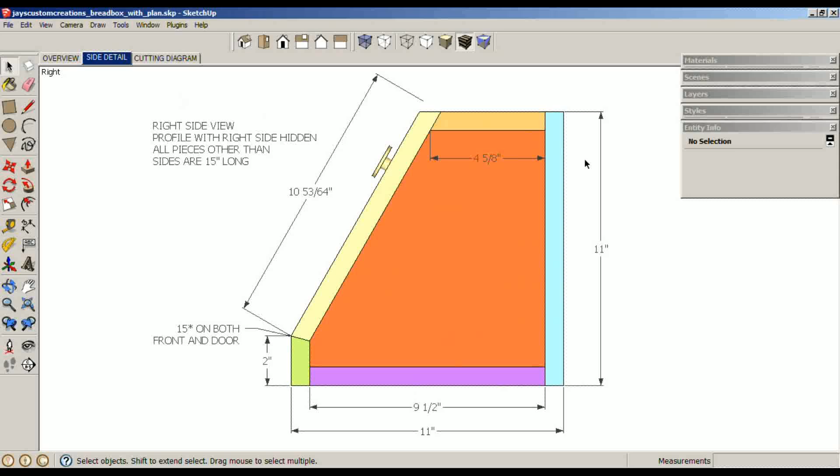Alright folks, this week's project is a pair of bread boxes, and I'm going to show you how to make the plan as well as the bread box itself. The bread box is very easy, you can whip right through making it, nothing special. But I want to show you how you can set up a little plan. I've got the overview, which is like a trimetric image of the box, a side detail which shows all the dimensions, and a cutting diagram to show your layout. Very easy to do, and I'll show you how you can make all these different scenes with different layers. Stick around and I'll get right to it.

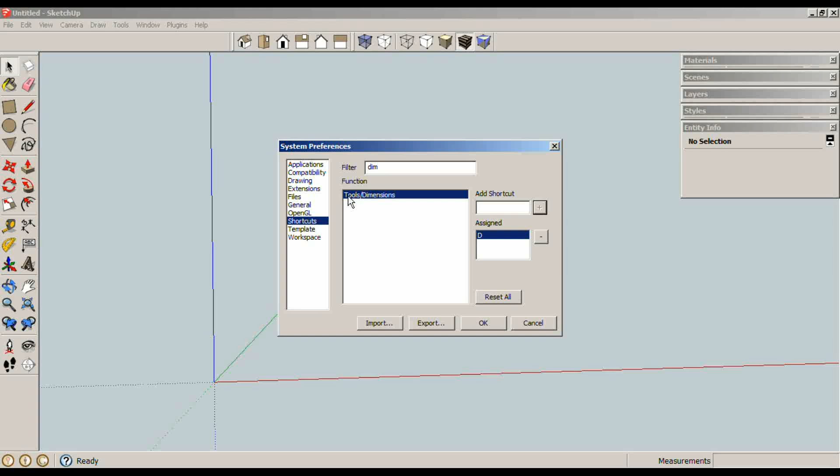Alright, so the first thing I need to do is set up a keyboard shortcut. I'm going to use the dimension command a lot, and I like to have keyboard shortcuts, it saves a lot of time. So Window, Preferences, this is how you can set one up. Shortcuts, find whatever tool you use a lot. I'm going to use the dimensions tool a lot, so D for dimension, press the plus sign to add it. Now every time I press D, it'll give me my dimensions tool. Test it out, D, and there's my dimensions.

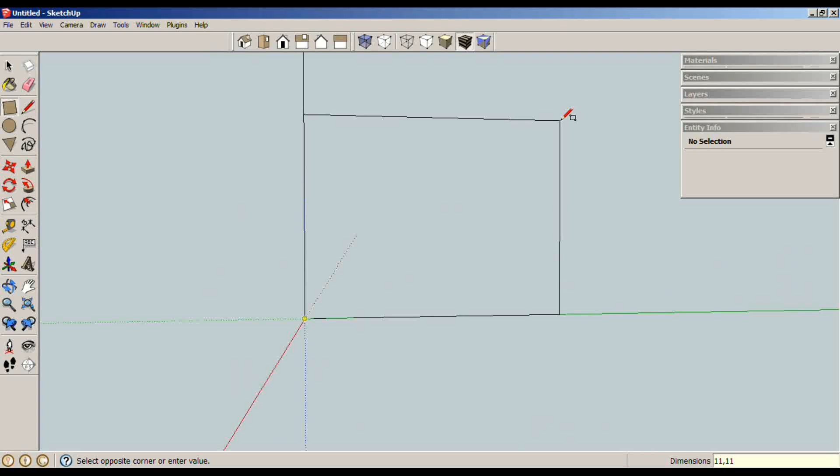Alright, so now let's start building the box, and I want to draw it on the blue-green plane, which is the side, and right now I'm on the blue-red, so let's rotate around. R for rectangle along the blue-green plane, 11, 11, and the only cut I have, T for tape measure, is 2 inches off the bottom, a 30-degree line off a vertical, and L for line to connect the dots here. Use a crossing to delete this, delete that. P for push-pull this direction, 0.75 inches for the thickness of 1x material.

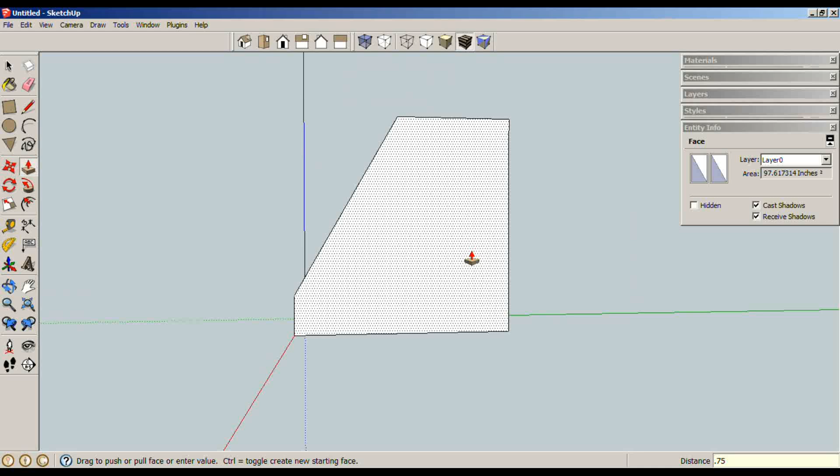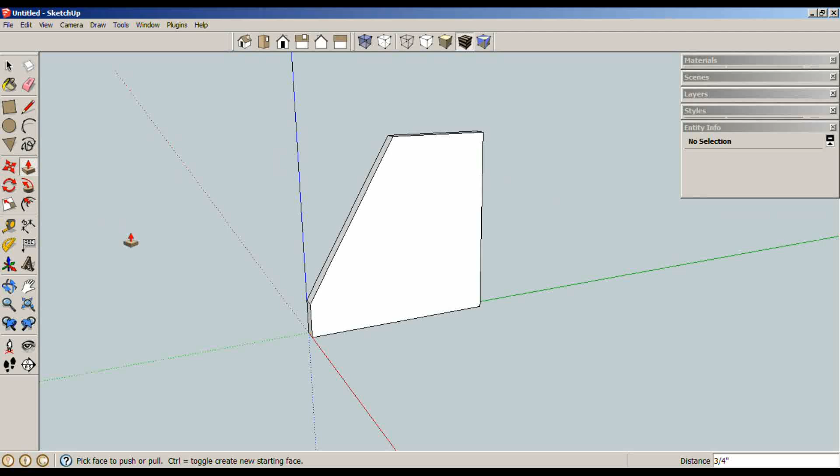Now, this is going to be built with rabbet joinery. One of them is going to be rabbeted construction, and the other one is going to be pocket hole construction. That doesn't matter as far as this drawing goes, because the only difference is there's going to be a rabbet here, and one on this one, and one that's not going to have the rabbet. So, no big deal. Let's use our offset command on this plane, and go in 0.75 inches for the thickness of our new material. P for push-pull, let's push the rabbet in 0.375, half the thickness of a 3/4 inch board. Spacebar, triple-click, G for component, enter.

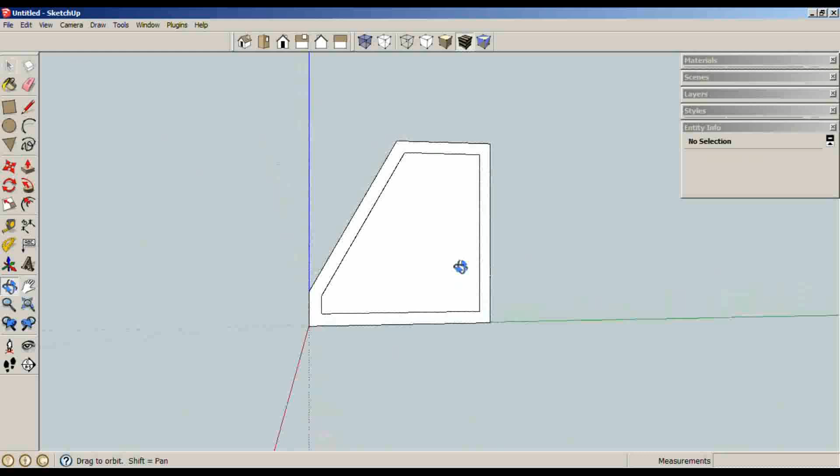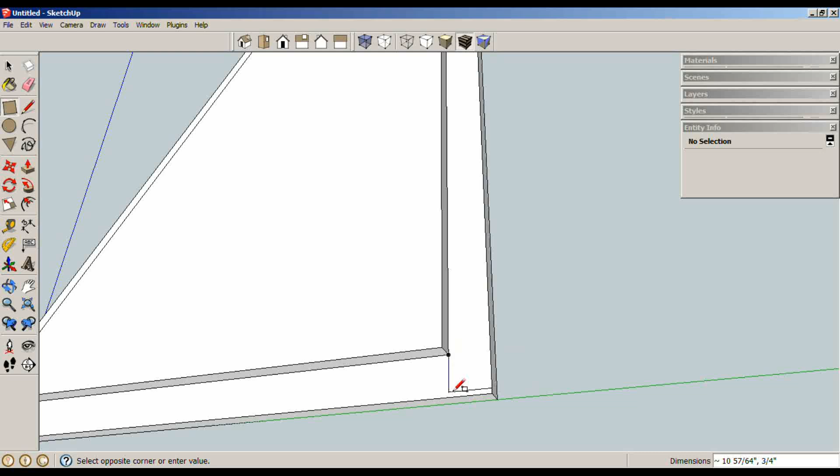Now we can start drawing our different sides here. The back is going to be the full length, so R for rectangle from this top corner all the way down to the bottom. To get this exactly where I want it, I can put my mouse over this, and once it says endpoint in component, it snaps to that endpoint, giving me a perfect vertical, and the little black dot's still highlighted. That's perfect right there. P for push-pull this direction, 15 inches, enter, spacebar, triple-click, G for component, enter.

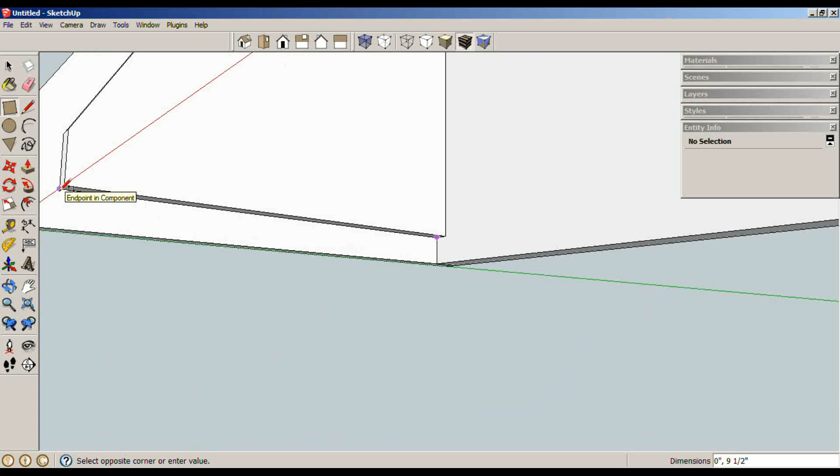All my pieces, other than the sides, are going to be 15 inches long. Alright, so let's draw the bottom. R for rectangle from here over to this point, endpoint in component, and it's snapping to that point down here. P for push-pull this direction, 15, enter, spacebar, triple-click, G for component, enter.

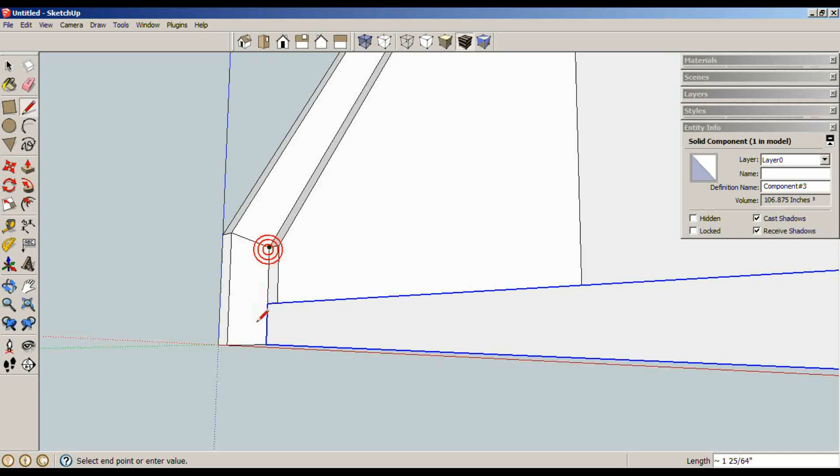The front face, this is a 30-degree angle, and I want the front and the door itself to split that 30 degrees. So we can just connect the dots here. This is 15 degrees. All my measurements are already here, no drawing needed. P for push-pull this direction, 15, enter, spacebar, triple-click, G for component, enter. So that's what the front face is going to look like.

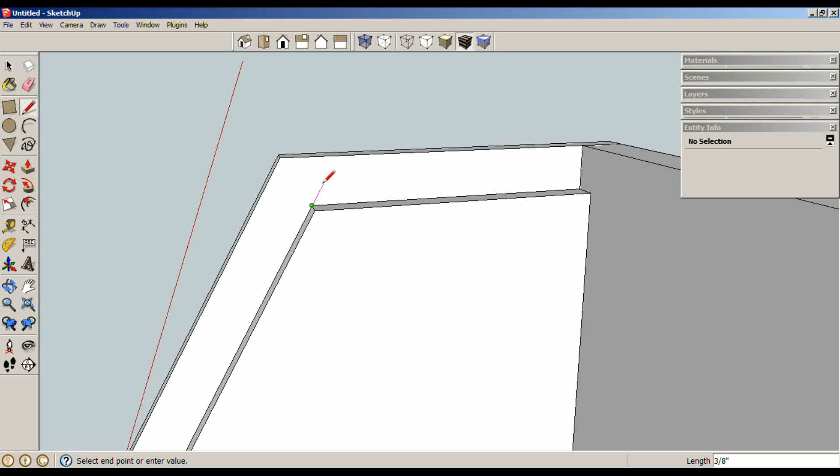And instead of splitting the difference here, I actually want the door to go all the way to the top. So let's draw the top piece. L for line over here, and I want this angle right here to be exactly lined up with this. If I hold my mouse over here, it says edge in component, and it'll snap to that edge, parallel to edge, so it gives me an extension. Whoops, I messed that up, let's do it again. Edge in component, now parallel to edge from the point up to there. P for push-pull this direction, 15, enter, spacebar, triple-click, G for component, enter.

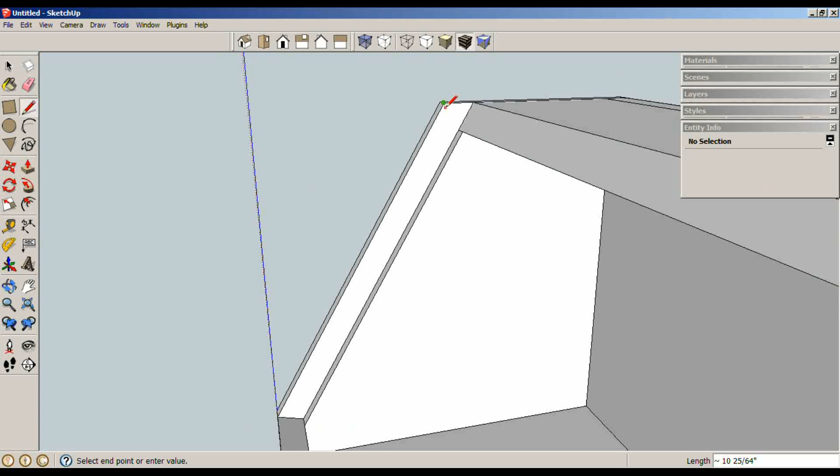Now the door itself, everything's already here, so I just connect the dots. That's the beauty of this project as far as SketchUp goes, very easy to do. P for push-pull this direction, 15, enter, spacebar, triple-click, G for component, enter.

Now I need to add my second side, so I've already drawn it over here. M for move, control brings up the plus sign, moving it from one side to the next, right click, flip it along the red axis because that's the direction I pulled it.

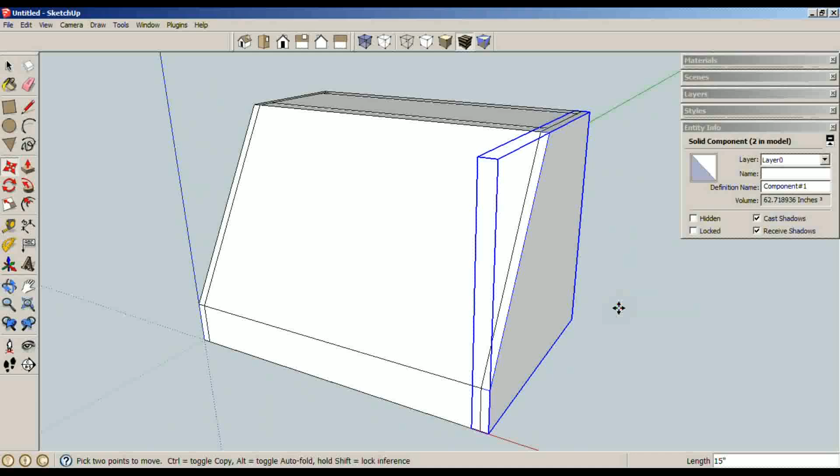So there it is, that is the bread box. That was super easy. Now I want to add a little pull here, so let's go T for tape measure.

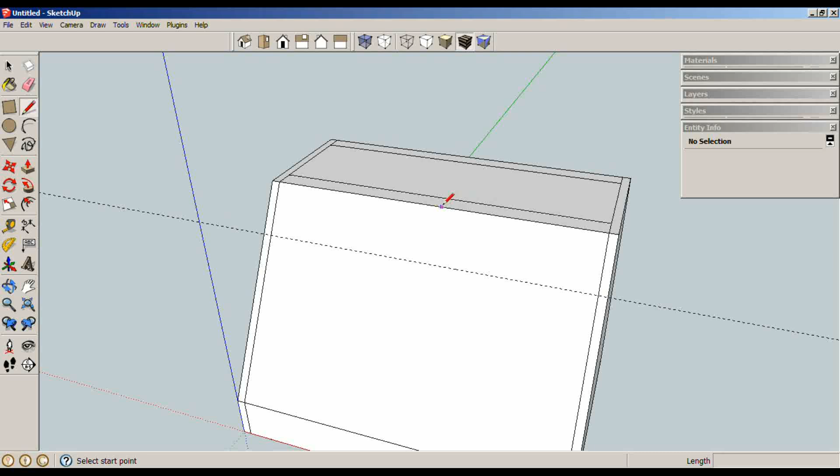I want to go down this face 2.5 inches, that sounds good. I'll draw a line right off of this midpoint. I'm using a line here because you can snap right to the midpoint of this project, and I'll connect the dots here. This gives me a reference point where I want my pull to be.

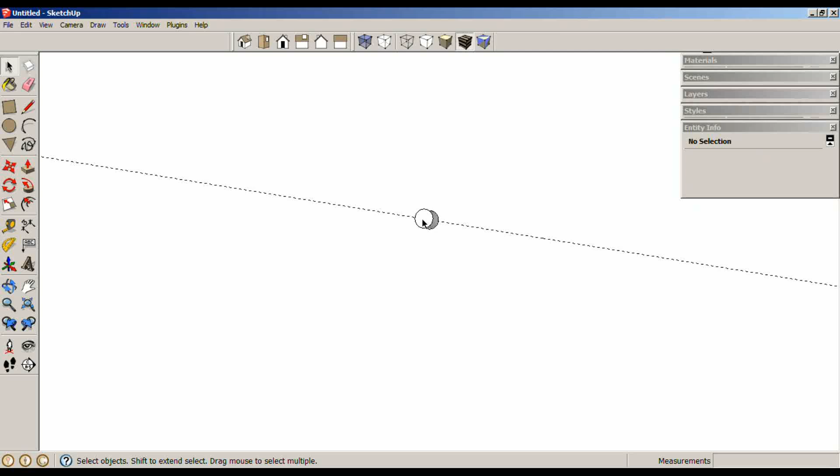C for circle, let's go 0.125, enter, something like that, and delete this line because we no longer need it. P for push pull, this direction, 0.25 inches, and we'll make that a component, I guess. Why not? C for circle, and just like our lines and edges, you can snap to them.

If you put your mouse on a circle on the outside of the circle, you can snap to the center of a circle. So 0.75 inches, that sounds good.

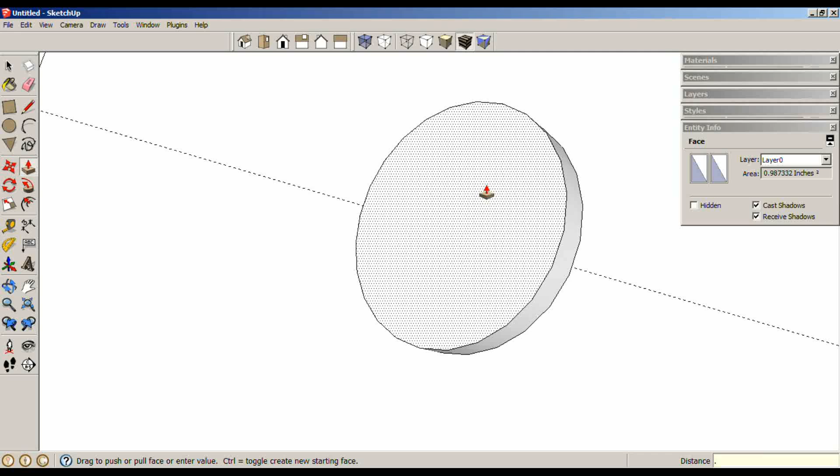P for push pull, this direction, 0.125, space, enter, space bar, triple click, G for component, enter. Alright, now I have a little fancy pull, yay.

But what if I just rotate this? So Q for rotate, and if I just rotate the door, the pull stays where it was. So let's not do that.

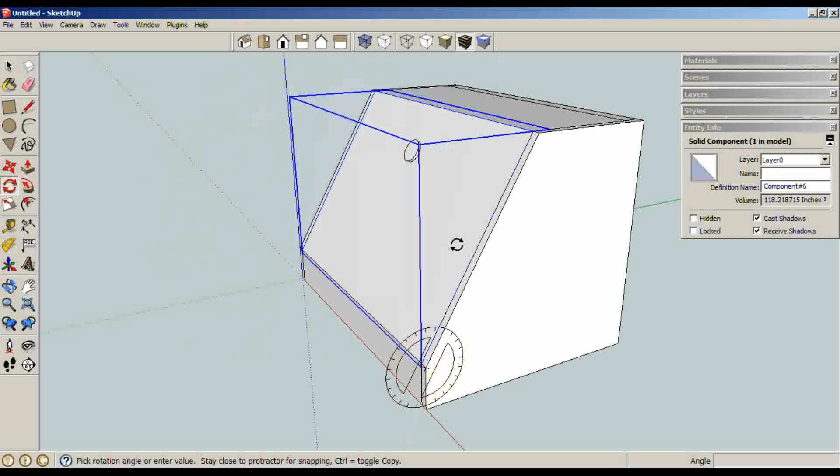Let's actually select all of this, select the door and the pull, right click and say you are a group. So now if I select a group and Q for rotate, I can rotate the entire door and the pull together. So yay for that.

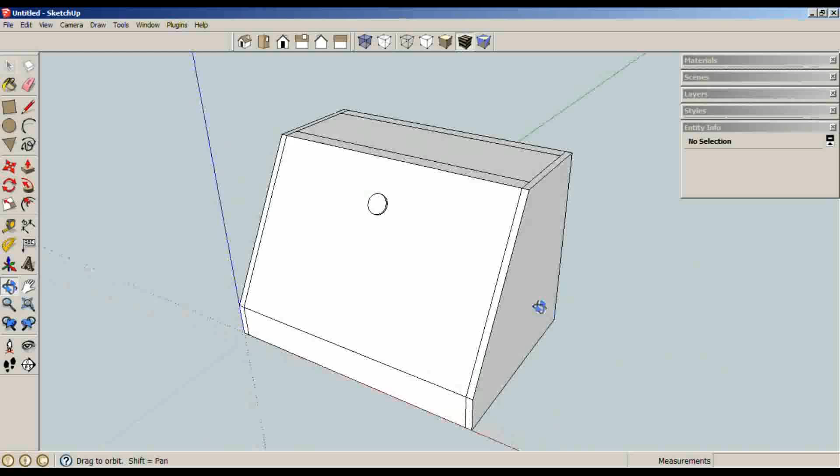So this is the actual bread box. That was extremely simple, extremely easy to make here in SketchUp. So I'm going to take a quick break real quick, and then we can start making the actual plan.

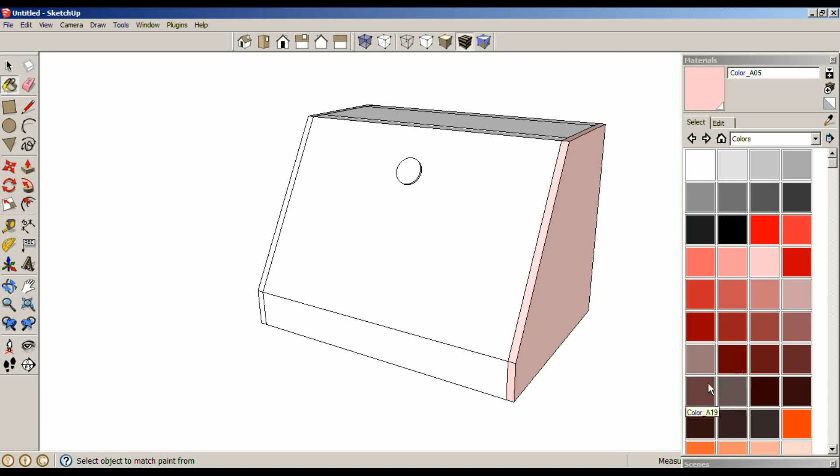Alright, with the physical box done, we can start working on the plan. The first thing I want to do is start distinguishing all these different parts. I like to just start assigning various different colors to all the pieces, so that way we have some type of distinction between them. I'm going to pick a color randomly for each piece.

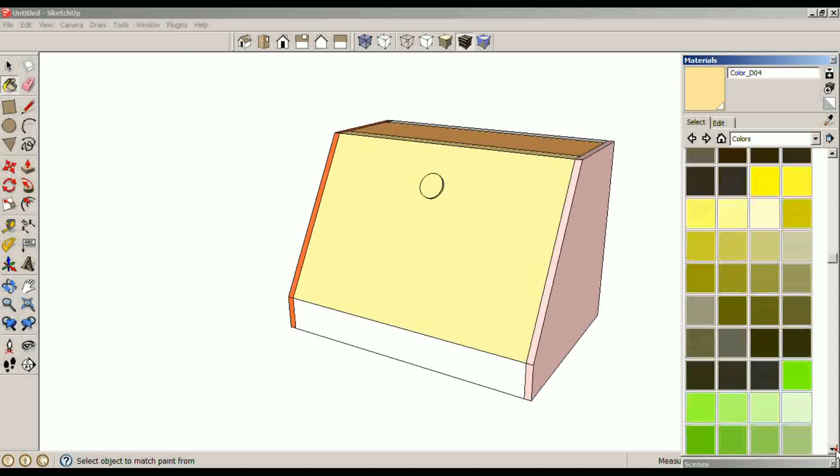I really don't care what each piece is, I just want each piece to be different. That way I can show you in the cutting diagram each individual piece. And just to be honest with you, these are some horrible colors here, but they are all different.

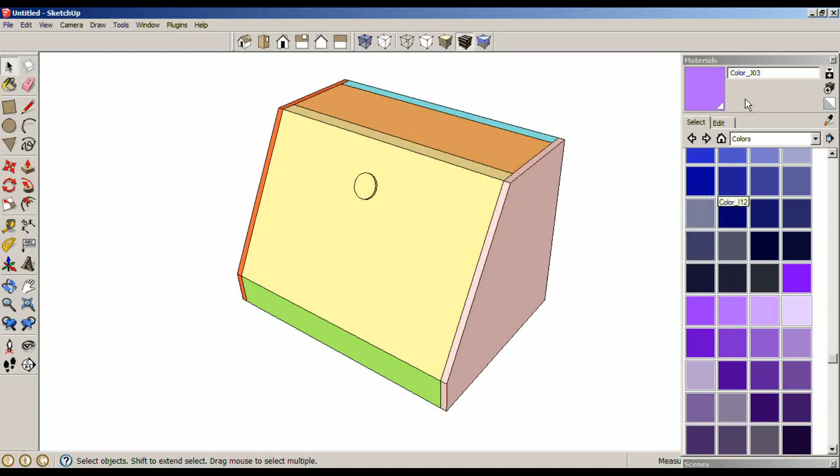Okay, now we need to set up some scenes and layers. First scene is, let's call this overview. Second one, let's call this—the only detail we need to show is basically the side, you can get everything in that one, so side detail. Third one is going to be my cutting diagram.

Let's go to overview, I just hit right click and update for whatever reason, I don't know. Alright, all of this I want to be on one layer, and I want the cutting diagram to be on another. So let's first add a layer, overview, and I can use the overview layer in both overview and side detail. Second layer is cutting diagram. So I want to put all of this—right click, entity info—on the overview layer.

Okay, now that I'm on the overview scene, I want to only have the overview layer visible. So let's uncheck these, right click, and update. Same with side detail. I'm on side detail and I only want overview to be visible, so uncheck these, right click, update.

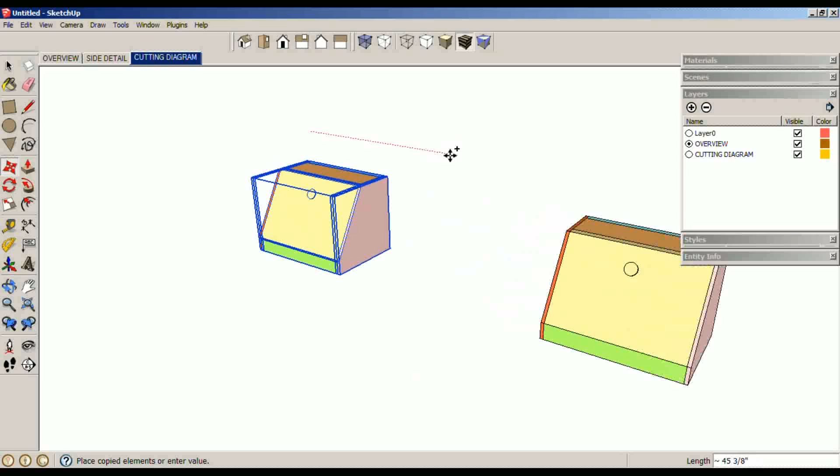Cutting diagram—on this one, I want to copy all of this to another location, and this right here—right click, entity info—it is still on overview and I'm about to hide it. But first I want to take the new one and say the new one is on cutting diagram. So now if I hide overview, you'll see this one disappear. Let me go onto this layer first, hide it, and it disappears.

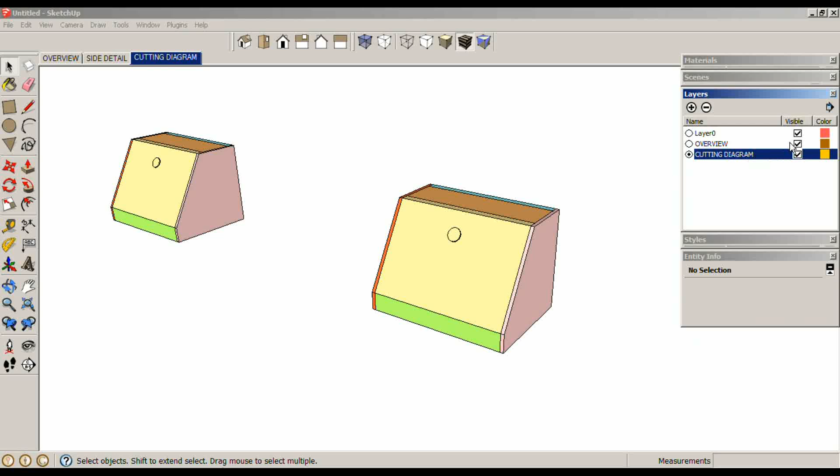Alright, update here. The overview is basically the bread box, and this is just going to be like a cover image, so nothing special. Side detail, I want to be looking perpendicular to this side face, but I want to see all of the detail right here. Easiest way to do that, and this helps because it's all color coded so you know which pieces go where.

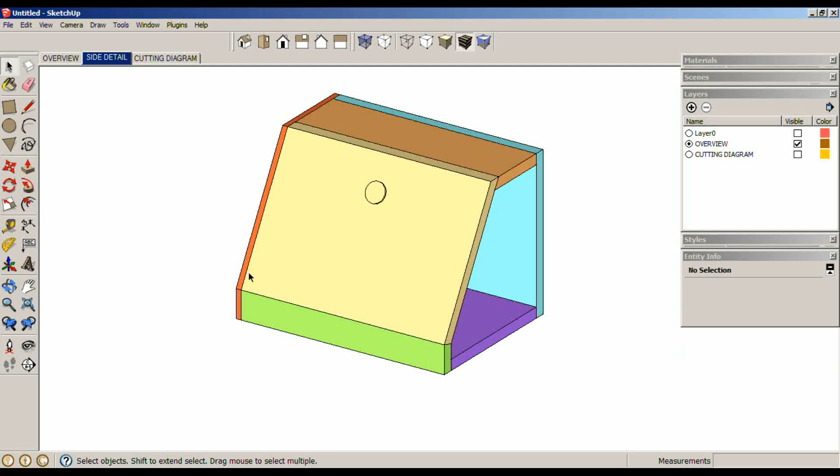Right click and hide this side. Let's take our camera and say parallel projection, that way all of my angles are no longer distorted, they are all the way they should be, and let's look at this from the right side. There you go, all of your pieces in the exact size and location.

So D for dimension, and this front face is 2 inches, and we will add a notation saying that this angle right here is 15 degrees on both the front and door.

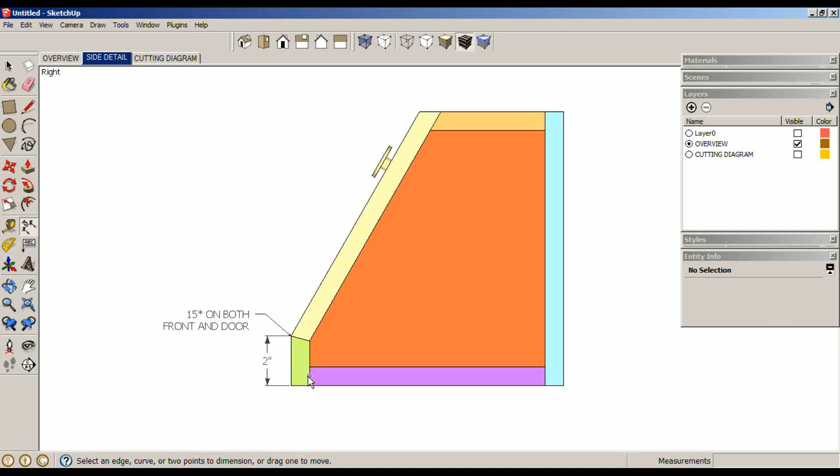M for move, let's just tighten this up a little bit. D for dimension, and this is the bottom. And because it's color coded, I don't even have to have a label saying this is the bottom, because according to the overview, you know what this piece is. D for dimension.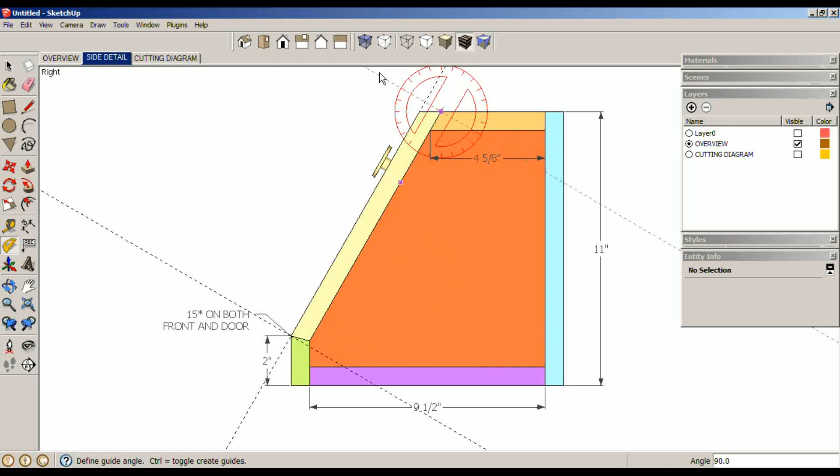D for dimension, the inside of the lid. This is going to be a little bit tricky because they're all angles and nothing is exactly perpendicular to the front piece. I'm going to add a couple guides first. I'll add one across the front and use my protractor to go 90 degrees off of this, and 90 degrees off of this. So now my leftmost part before I cut the angle, and my rightmost part before the angle, I can snap to those.

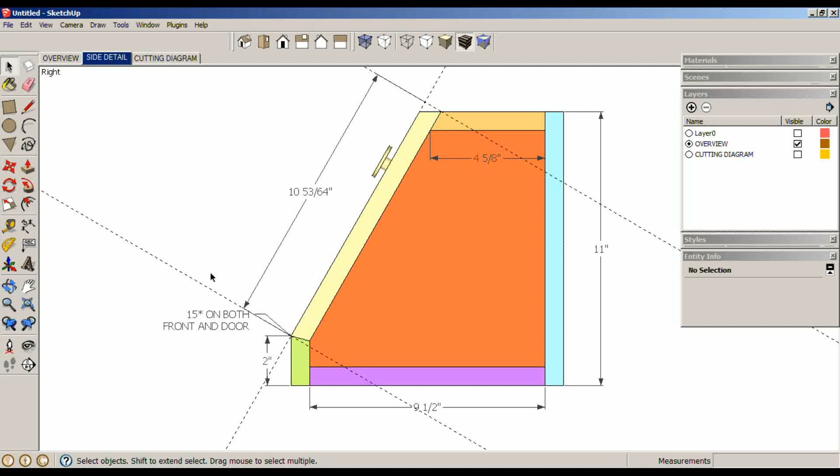So D for dimension from here to here. This gives you the length of the front door. Let's delete my little guides here. They've served me well, but I no longer need them. Let's M for move.

And it's trying to snap to something. Yeah, that's alright. So with all of these dimensions right here, you know everything about all of the pieces.

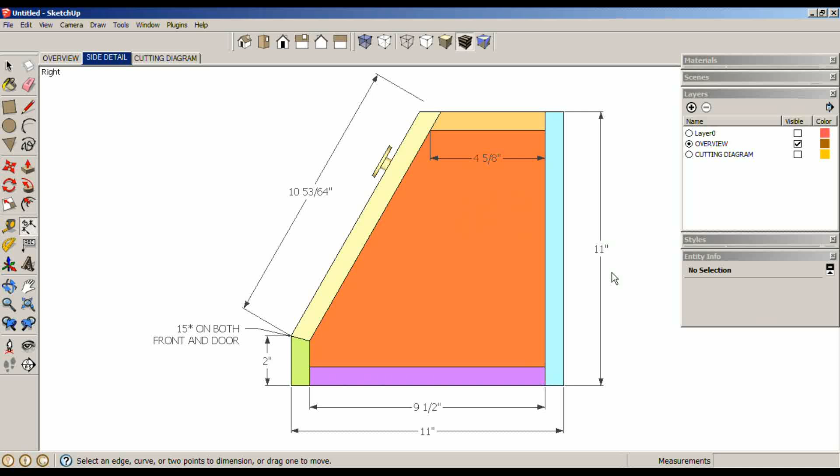Oh, I'm sorry, I needed one more for the total width here. So D for dimension, from here to here. That way you can tell that this side piece is not only 11 inches tall, but it is 11 inches wide.

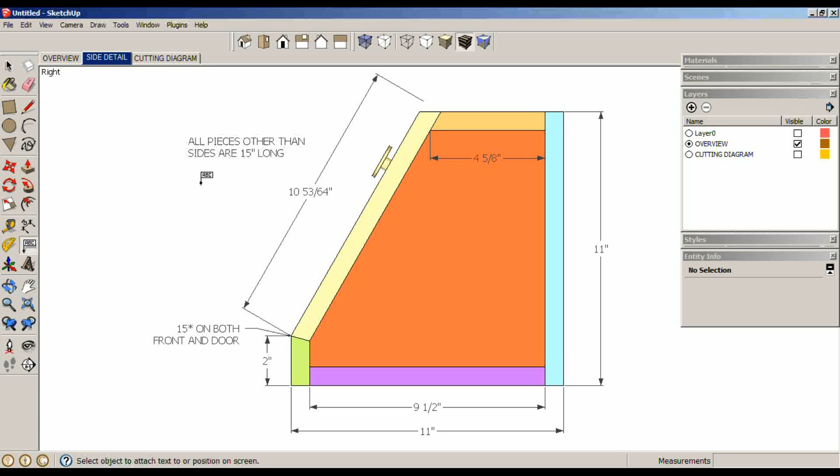And also let's just add a little notation here that says all pieces other than sides are 15 inches long. Right click, update. Whoops, keyboard shortcut, my bad.

Alright, so now let's... yeah, that's it. Go back to overview and you see all my dimensions are still there.

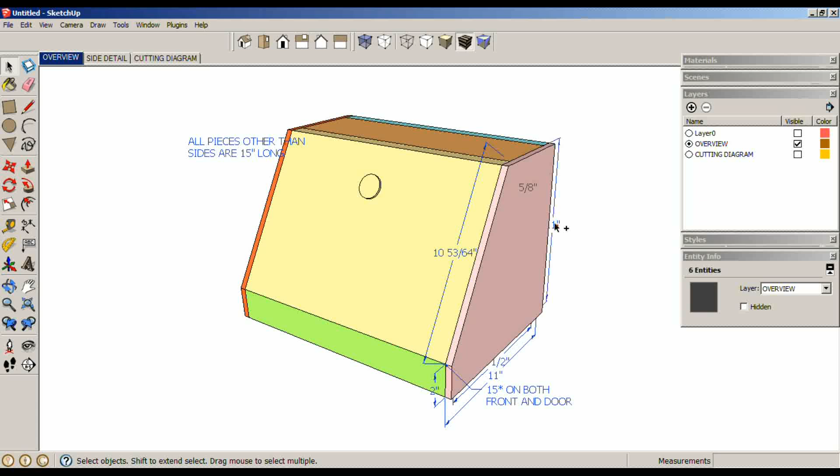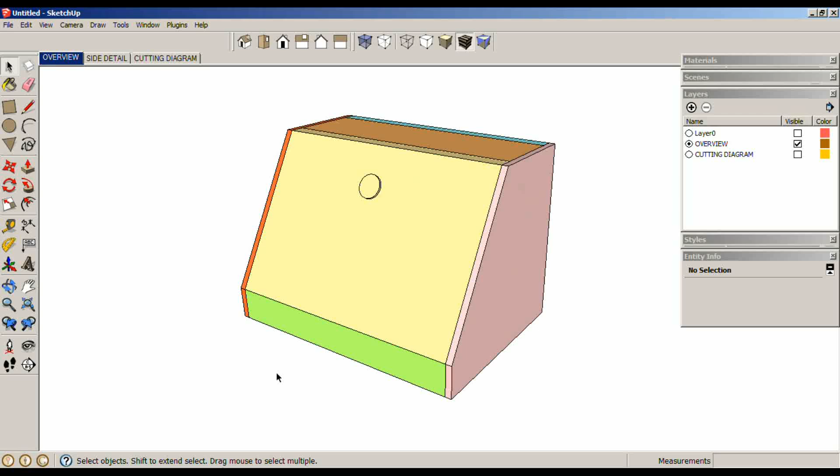So let's select all of my dimensions real quick, and let's go to hide. Select just that dimension, right click, edit, hide. There we go. Now let's right click and update the overview, so in the overview my dimensions are hidden. I'll go to the side detail and my dimensions come back.

Now let's go to cutting diagram. I don't want any of this. I don't know why it does that. Let's go to cutting diagram, uncheck overview, right click and update. Let's see if that did it.

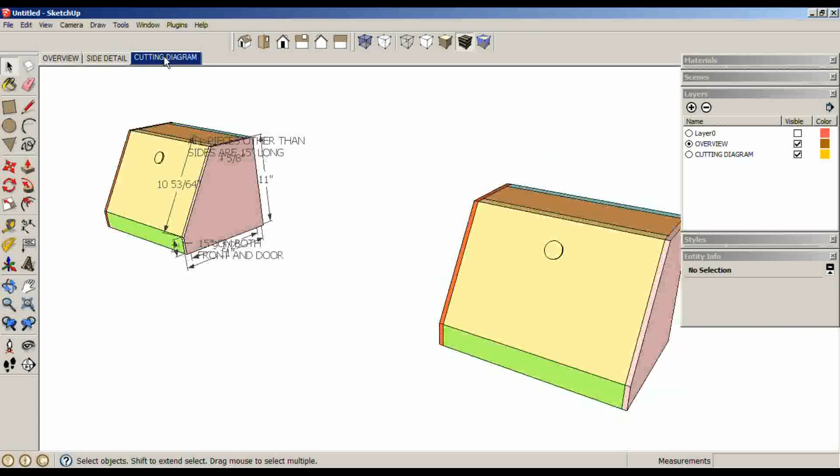It did not. So let's just do this and go to hide. I don't know why it's messing with me like that. Right click, update. There we go, it's hidden. That's all that matters. Alright, in the cutting diagram, now I'm just going to lay all my pieces out.

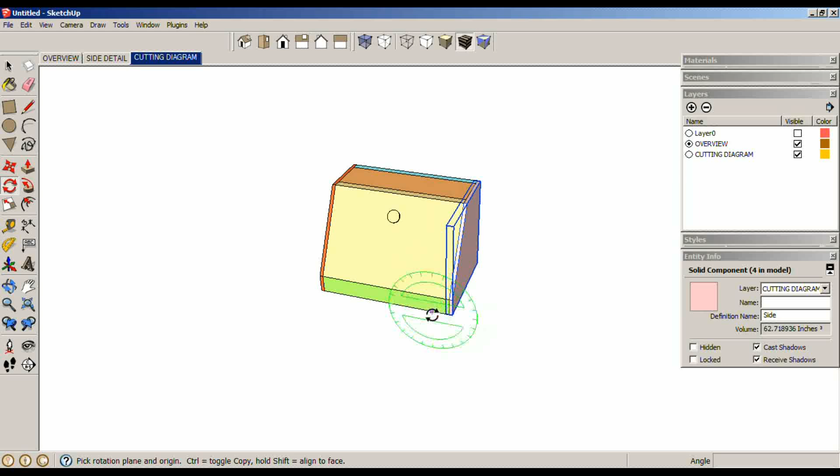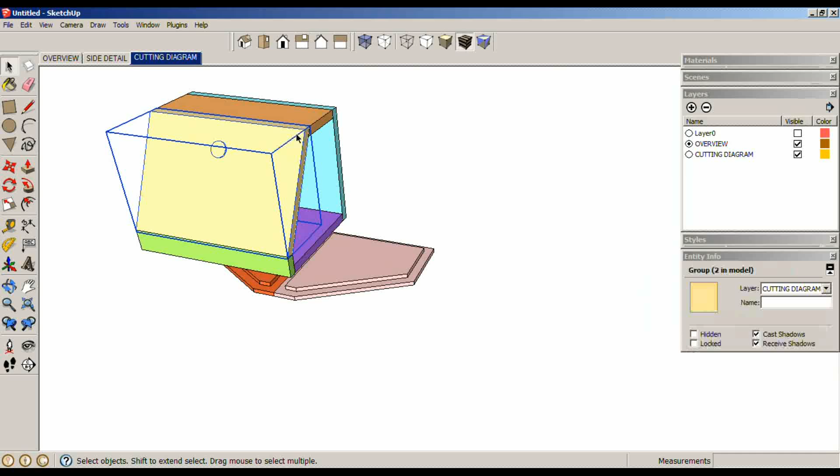Rotating everything on edge so that... come on, just going to lay them out like this so that I can put them on a 1 by 12 rather. And I'll just start positioning these like so, and move, just start moving pieces.

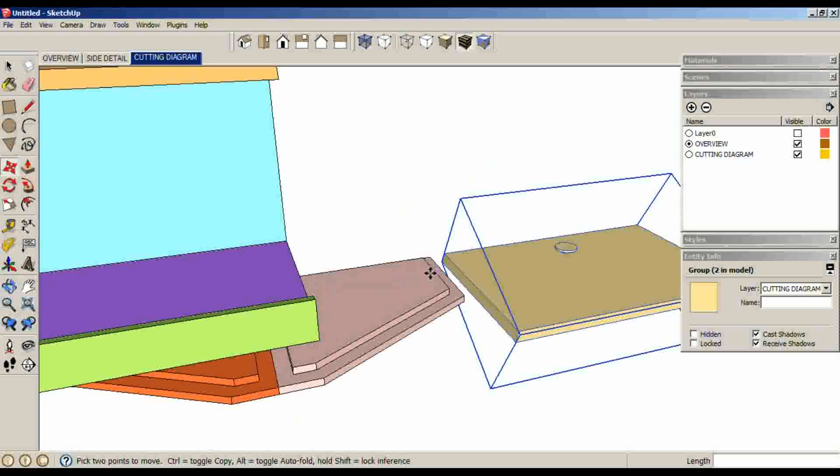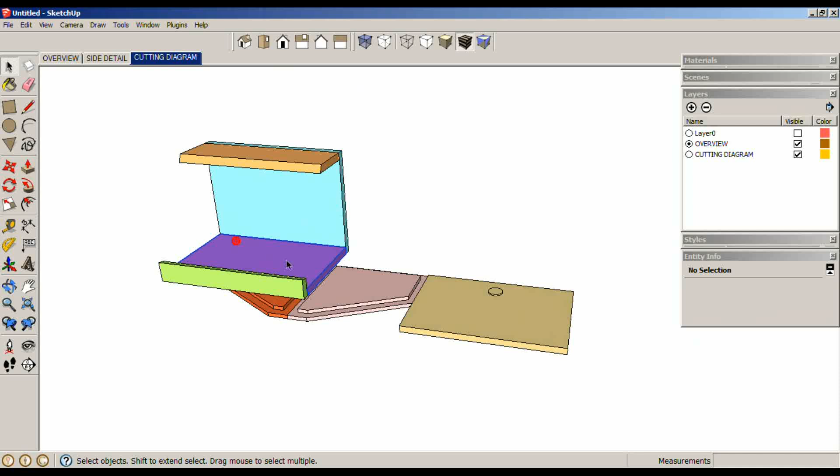M for move along the blue axis, so that plane is the same right there. M for move. Like I said, there might be easier ways to do this with the plugin, cut list right here, cut list plugin. But once you have that printed off, it no longer stays with the file. So I like to do it this way. That way, if I give this file to somebody, they have the actual cut list without even installing the plugin. So it's a little bit more work up front, but I think it's worth it.

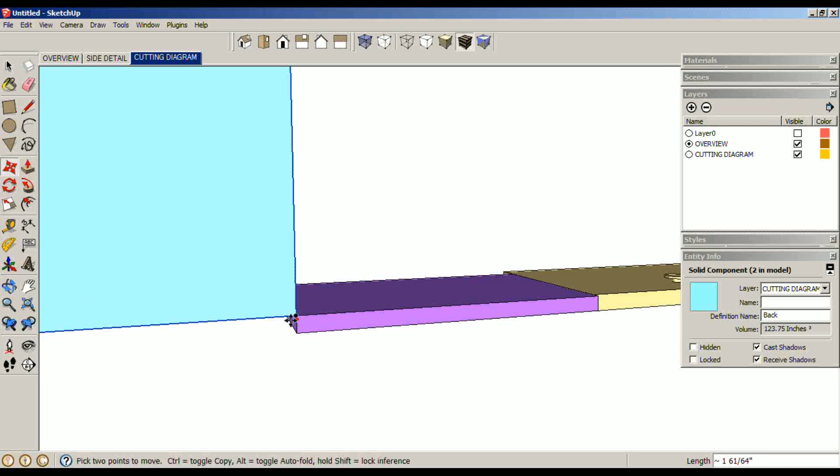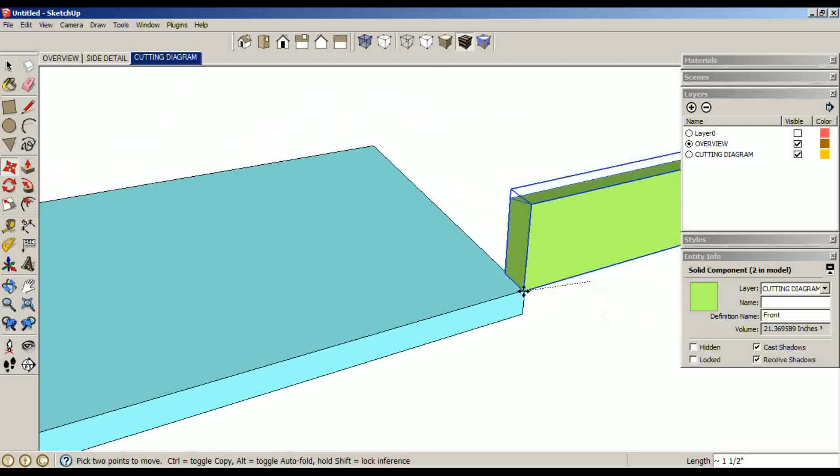Q for rotate from this point, 90 degrees, and these... goodness, there we go.

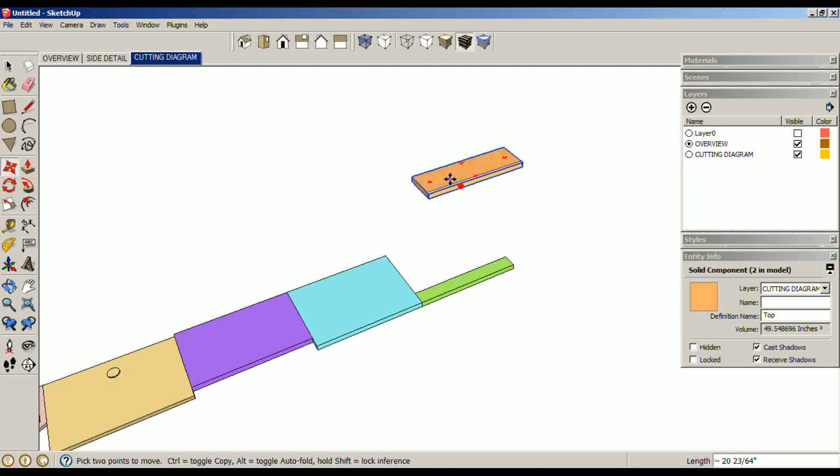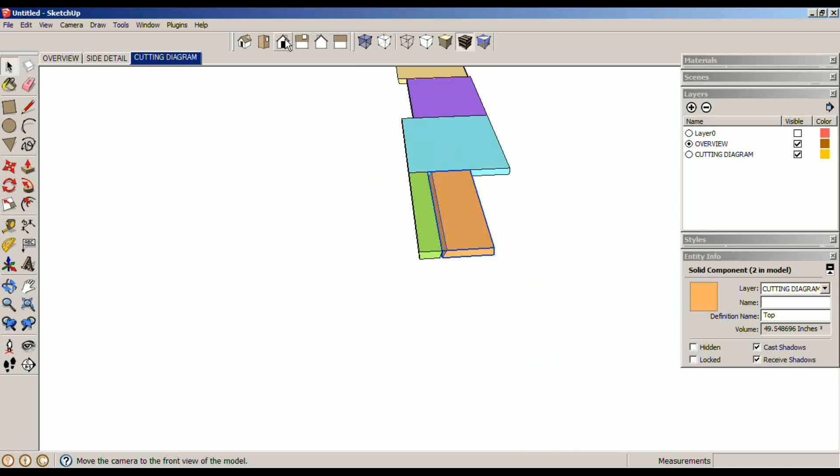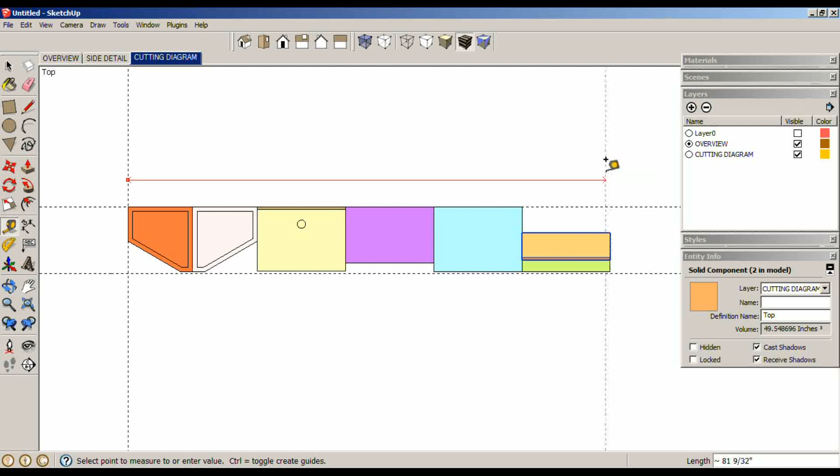Alright, so now if I go top down and make sure I am in parallel projection, I can say tape measure and go down 11.25 inches for a 1 by 12, make another one right here, and then I am at 80 something inches. So if we get an 8 foot, which is 96 inches, this is my cutting layout. This tells me that I need a 1 by 12 that is 8 feet long.

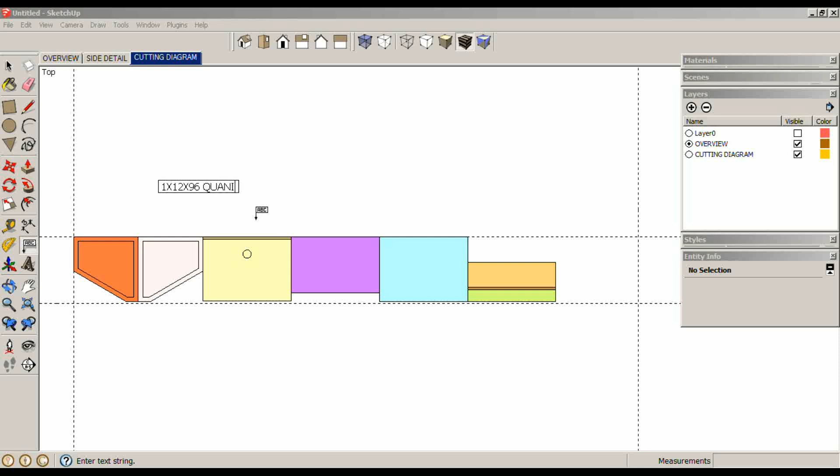So I can go to add some text here: 1 by 12 by 96 inches, quantity 1. That's basically the layout right here. So I'm happy with that.

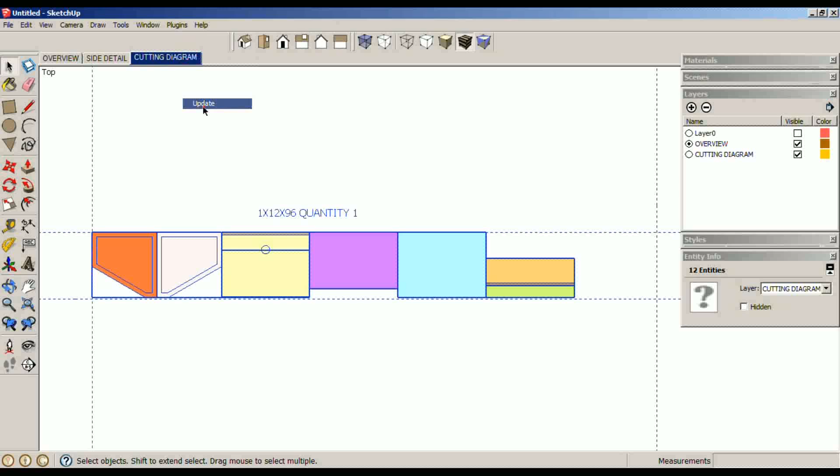Right click, update, and I need all of this, every bit of this, because I have added some more pieces. Let's say this is all the cutting diagram. Right click, update. Now if I go to side detail, overview, and cutting diagram, everything is where it needs to be.

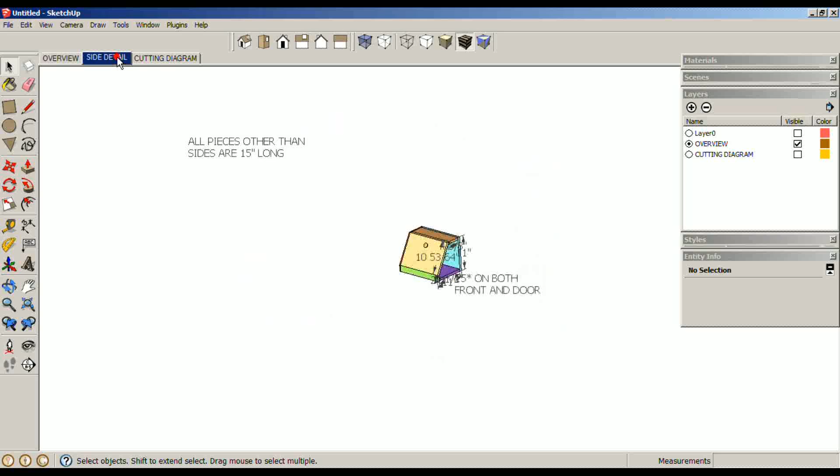I don't need to give you the dimensions on the cutting diagram because you have them all in the side detail, and you know what piece is what because of the color coordination. So it may take a little bit up front, maybe a little bit more confusing to do this, but it's good practice working with the commands. Also, if I give this file to anybody, they automatically have the cutting diagram without even installing the cut list. So as soon as they open this up, they have everything they need ready to go. That's how you make a plan in SketchUp.